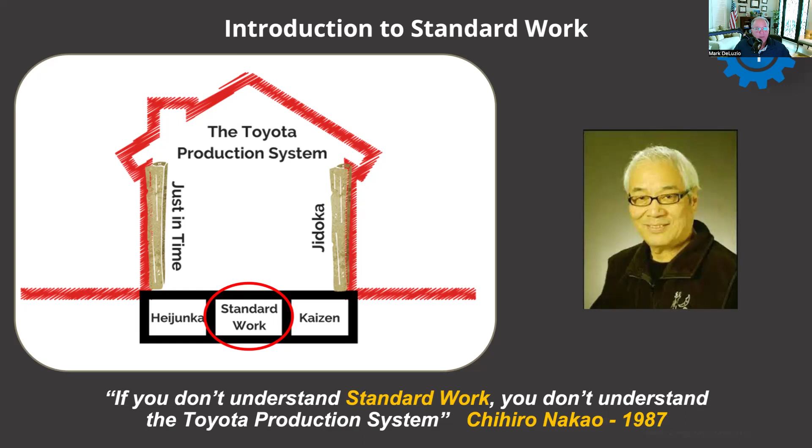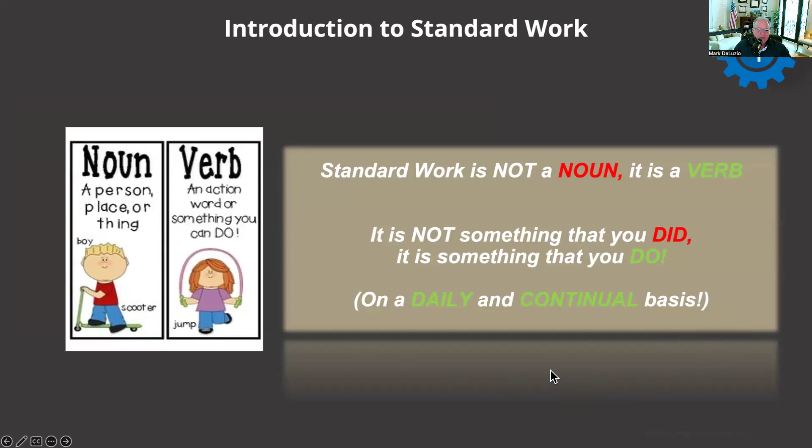Okay. I want you to think about this. Standard work is not a noun, it's a verb. It's not something that you did, it's something that you do. You work to standard work, you work to this. It's an ongoing, continual endeavor. Standard work is not a project that gets completed and checked off. It's how we run our operations.

And I'd like to give you an example of what I mean, and I like to use outside analogies. If you're setting up a manufacturing cell, or let's say a flow in an office, and again, one of the requirements for standard work is it needs to be a repetitive process. You look at people and process layout, instructions, and what I call rhythm. I'll get to that in a minute. People: in manufacturing, of course, your production workers, your operators. In the office, you have your office staff. And in an orchestra, you have your musicians.

Now, what about the process layout? We have a cell design for manufacturing. We have an office flow in terms of how we're going to flow work. And in an orchestra, you have all the instruments laid out in their appropriate sections, right? Percussion and woodwind and all that. Okay. Now, let me stick with the orchestra for a minute. If I said to you, hey, we got this orchestra all laid out exactly the way we want it, but we're not going to give them any sheet music, how do you think that orchestra is going to sound? Not good at all, right?

How many times have we set up ourselves, whether it be in the office or in manufacturing, and we didn't provide the sheet music, which is the documentation of standard work? And I'll go into that documentation a little bit later. We do it all the time. And then we say, well, geez, I don't understand how come that cell can't get their product out? And we have all kinds of takt time violations and everything else, which I will talk about.

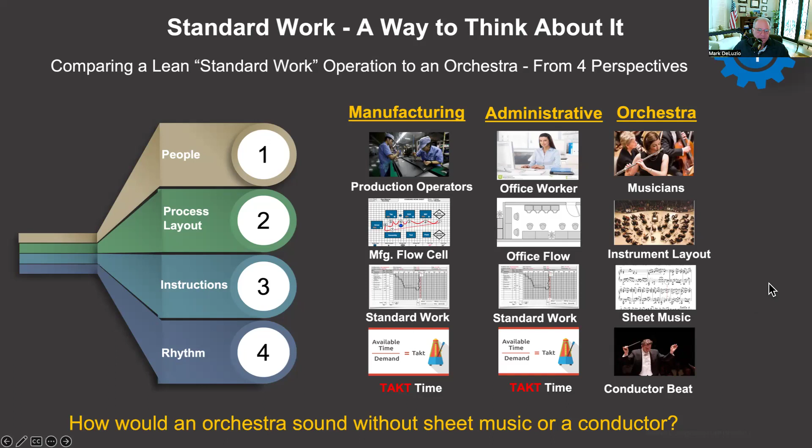Okay. What are the three elements of standard work? Well, takt time I already mentioned. Takt time is the beat, it's the rhythm of how often we have to manufacture a part or deliver a service or a document, whatever it might be. The work sequence happens to be those steps that an operator is going to take that have to be within takt time. So maybe it's assembling a part, loading and unloading, gauging, or whatever it may be, right? And standard work in process is the amount of inventory needed to keep your operators flowing.

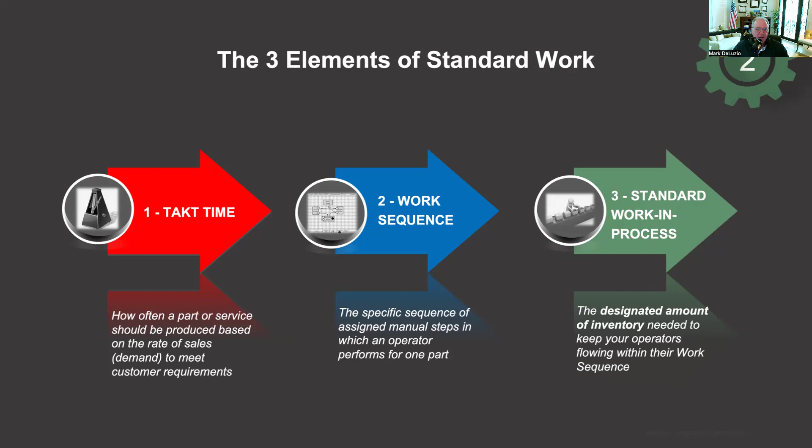So in other words, if I have a machine that has a piece of work in process in it and it allows me to walk away to the next process, that piece is called standard work in process. I'll get into that a little bit more. These are the three elements of standard work. Now, when people say, oh, yeah, we got standard work, they refer to anything and everything that's written and documented as standard work. Well, that is not in context of what we believe standard work is.

So, takt time. Okay. Right out of Toyota, takt time is the pace of sales in the marketplace. Takt time is based on customer demand. I'll show you the calculation in a minute. And don't confuse takt time with any other form of cycle time or lead time. Takt time is written in red on purpose. I'll explain that in a minute. But how often should a part or service be produced based on the rate of demand to meet your customer requirements?

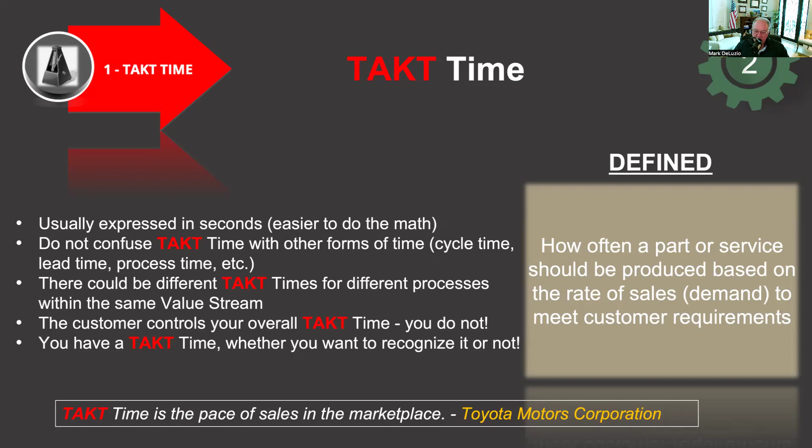Now, the history is it's a German word. The German aircraft firms moved fuselages ahead to workstation at intervals determined by what they called takt time. And Mitsubishi, who made the Junker aircraft in World War II for Germany, coined this, and Toyota incorporated it into the Toyota production system after the war.

Takt time was written in red because Taiichi Ohno was sick and tired of people confusing takt time with cycle time. So to honor Ohno and Nakao and Iwata, I always write takt time in red. Whether I draw the line, if I'm on a whiteboard, I'll look for a red marker. It's out of respect, but it's also the discipline that's instilled in us in terms of how to think about takt time so that nobody gets confused.

Now look at the metronome on the left. That's kind of like keeping the beat of an orchestra, right? That's what takt time is. What's that takt image in your company? When you walk in, can you feel a takt image, a beat, a rhythm? Can you kind of feel it? Can you hear it? Can you smell it? Can you see it? That's what we're looking for in terms of takt time.

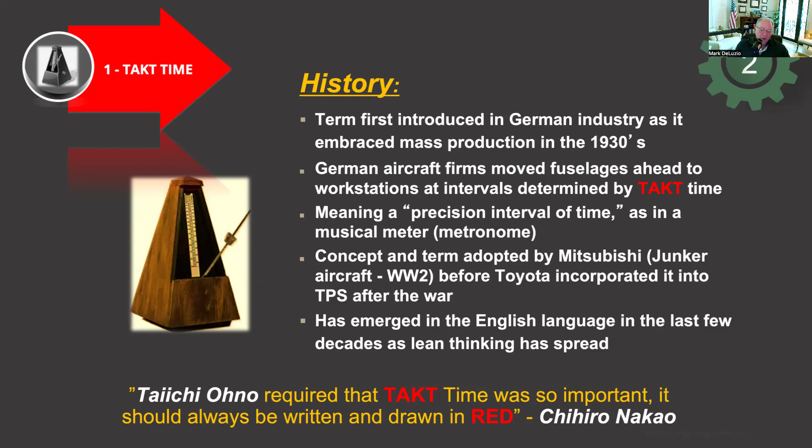How do we calculate it? Pretty simple. You take your available working time divided by your demand for that area. So this could be for a cell, for a work line, for a department. It's got to be relative to the area itself. So if I have 27,000 seconds available, and I take out breaks because that's not productive time, or cleanup time or whatever, and divide by 350 units, my takt time is 77 seconds. So that's how we calculate. It's a pretty simple calculation, right?

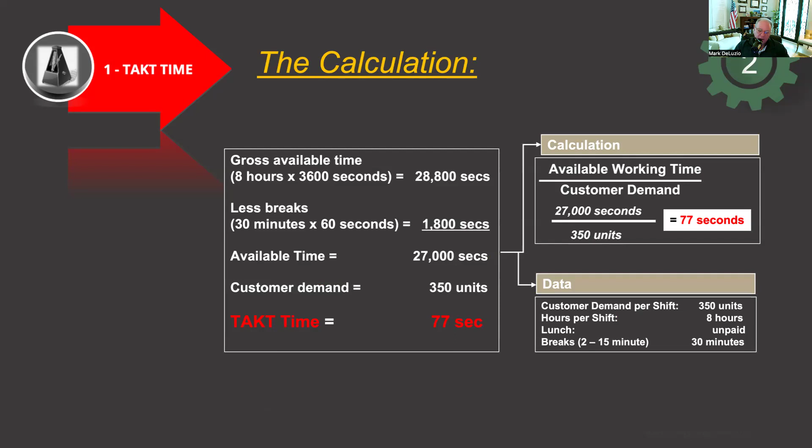Now, what do we use this for? I could use it for operators required. I take my cycle time divided by the takt time. The cycle time is all of the seconds it takes to make one product. So let's just say my takt time happens to be 100 seconds, and I have 900 seconds worth of cycle time. When I divide those out, it means I need 9 operators.

Now, no one of those 9 operators can have work more than 100 seconds. If I have one at 110 and everybody else below takt time, guess what? My drop off rate in that cell is 110 seconds. So I'm going to miss my deliveries because I am not producing in accordance to takt time, in this case, 100 seconds.

My standard work in process. Well, if I have, let's say, a curing oven or an outside process that goes to, let's say, heat treat, I take the lead time divided by takt time. That's how much inventory I need to have in the cell for me to continue to work in a one piece flow environment.

And my processing capacity is my machine time and my load unload time. That has to be lower than takt time. Otherwise, I'm going to have a bottleneck with that piece of equipment. Again, if my takt time's 100 seconds and my machine cycle time plus the load unload time happens to be 120, I'm going to miss by 20 seconds every time I have a part pass through that machine. And that adds up at the end of the day. So not only do our operators have to be in concert with takt time, so does our equipment. And all this gets documented on a standard work combination sheet, which we'll show you in a bit.

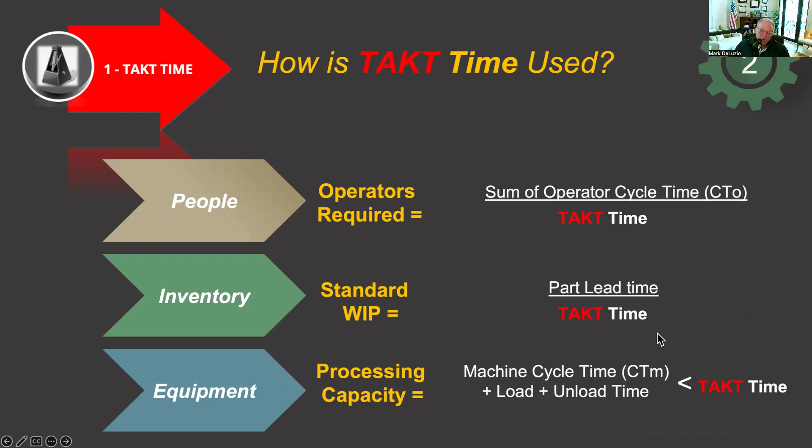Okay. Work sequence. This represents the steps required for an operator to complete one cycle of work for one part. Remember, the work sequence must be equal to or less than takt time. If it's greater, you got yourself a bottleneck. So let's just take the three people in this cell. They're probably doing unload, load, assembly, gauging, whatever it is, right?

That sequence, the amount of time it takes that operator to do that, including walking time, which we want to reduce as much as possible, is in fact the total cycle time for that operator. And it's got to be under takt time. Same with the other operators as well.

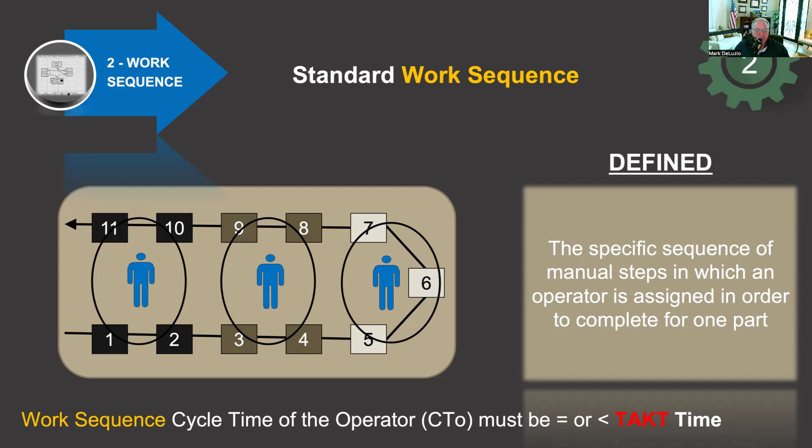So again, I want to make sure that my operators are within the context of takt time. That's my work sequence. Now here's a way to think about it. One of the things Nakao told me was, DeLuzio-san, how can you hit takt time when you have your operators doing all these other jobs that aren't spelled out in their work sequence in the context of standard work? You've got your operator leaving the cell to go get tooling and go get materials and deliver parts to finished goods. Well, that's not part of their standard work.

He said, DeLuzio-san, operators should operate. That's all they should do. Now, the analogy I like to make is race car driving. The driver is the operator, the track is the work sequence. Our job is to keep that driver on the track as long as possible until they win the race, right? Well, maybe we want to save on productivity and get rid of some pit crew people, and we'll have the driver change his own tires. Well, that's not going to work, right?

In the old traditional cost accounting, I was taught that indirect operators are waste and direct operators are not waste. Well, guess what? How would you like to get rid of your pit crew just in the context of saving on cost? If you're a race car driver, guess what? You're going to lose the race. Now, both of those indirect and direct operators have waste within their cycles. Just because the operator is putting a product together doesn't mean that that direct operator doesn't have waste. And same goes for the indirect operator.

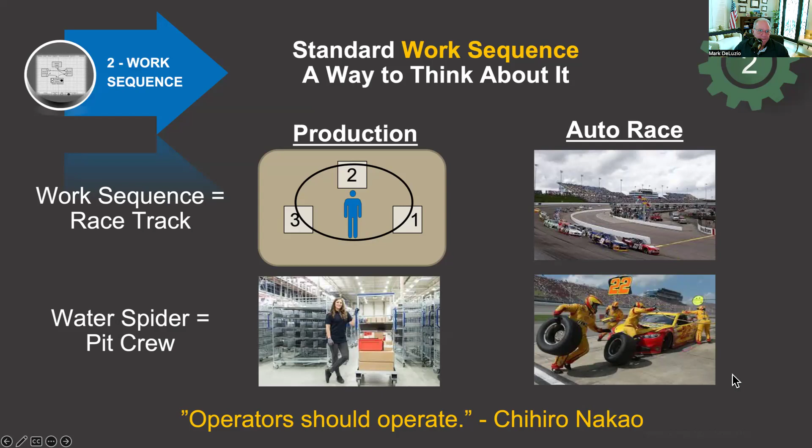Okay. Standard work-in-process. It's the amount of inventory needed to keep the operator flowing. So what I don't want to do is have the operator load a part into a machine, hit the green button, and stand there and watch it. What they should do is unload the part that's been there already, load the other part, hit the green button, and move on to the next operation with that part. You're not going to stand there and watch your clothes dryer dry clothes. You're going to walk away from that and go do something else, right? So we want to think about where the opportunities are.

Now, a lot of businesses have curing ovens, they have burn-in times, and all that. By the way, I would challenge these burn-in times really big time. So many times they're divisible by 8 hours. It doesn't sound like an engineered standard to me. I once challenged a 48-hour cure time, and when the engineers got done, it turned out to be 20 minutes. Think about that. So challenge everything and don't accept these times as being gospel, especially when they're divisible by 4 or 8 hours.

So you're going to see that. Oh yeah, we have to burn that in for 8 hours. Geez, that's what your shift is. How come? Oh, the engineering standard turned out to be exactly 8 hours. That's amazing. On this 48-hour one, I just challenged them and said, "Can we do it in 47?" They said, "Yeah." How about 46 hours? Yeah, it should be okay. I'm going to keep going until you tell me to stop, guys. Well, they didn't know. And when they went and did the study, they found out that it only needed to be 20 minutes of curing time. So challenge everything.

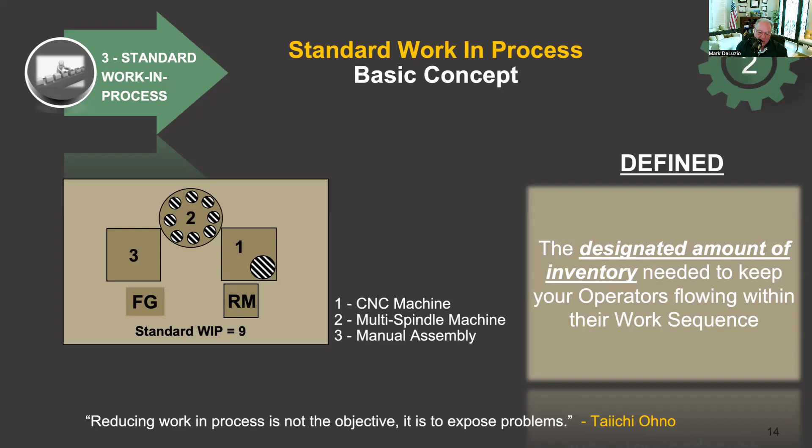This is right from Toyota, right off their website. A standard in-process, work-in-process stock is the amount of material that is flowing through a process when work is proceeding smoothly. It is the minimum amount of material needed to maintain a smooth flow of production without accumulating inventories.

Got that? That's right out of the mouth of babe, if you will. Okay? Right out of the mouth of babe.

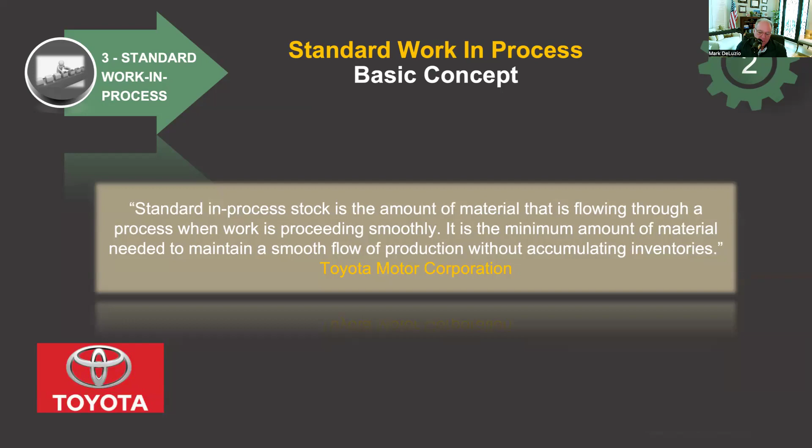I'll let you read about pitch, I'm not going to get into that too deeply right now. But pitch is the amount of time the water spider has to come back to replenish the inventory, and that's based on takt time.

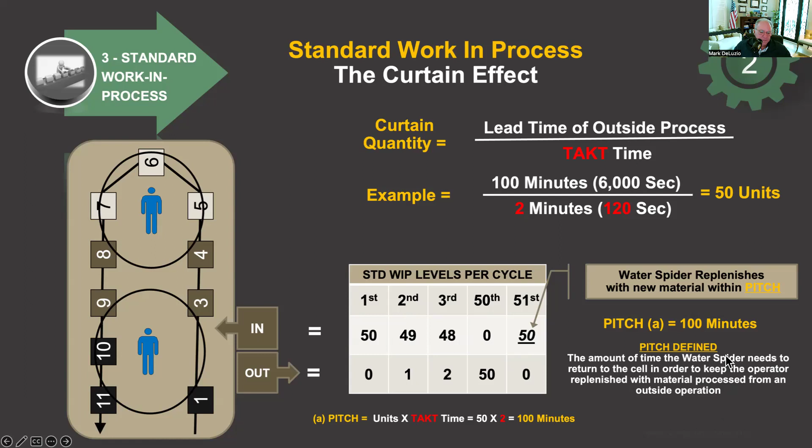There's 3 types of cycle time. The operator cycle time is the amount of time the operator takes to complete one work sequence. There's a machine cycle time, the amount of time it takes for the machine to cycle for one unit. And there is the processing cycle time, which means your machine cycle time plus your load and unload of that equipment. All right, so that's the three.

Now everybody seems to confuse this with takt time, and it's not. It is not takt time, it is cycle time. And all these cycle times have to be in context, within the context of the takt time.

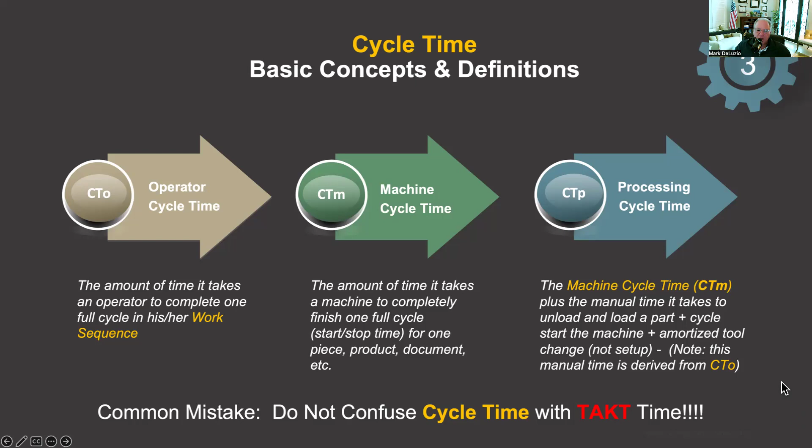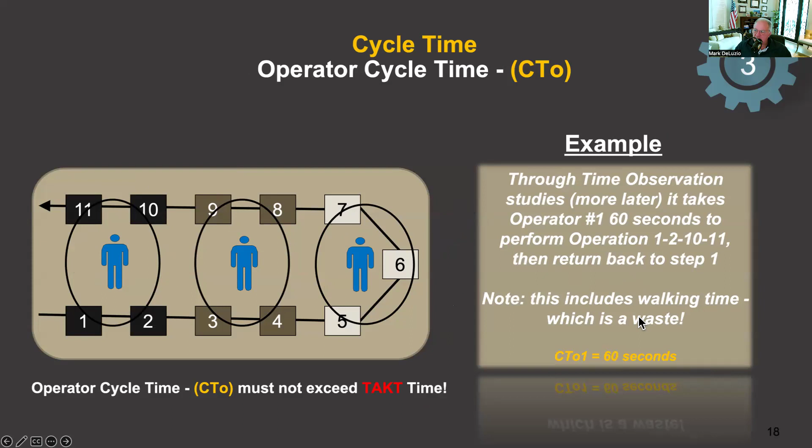A way to look at it: if the operator takes 60 seconds, operator one takes 60 seconds, the cycle time of the first operator is 60 seconds. That has to be under takt time, and you want to bring it as close to takt time as possible.

The cycle time of the machine would basically be when the operator starts the machine, the time the machine takes to cycle, and when it comes to a stop. That's the cycle time of the machine.

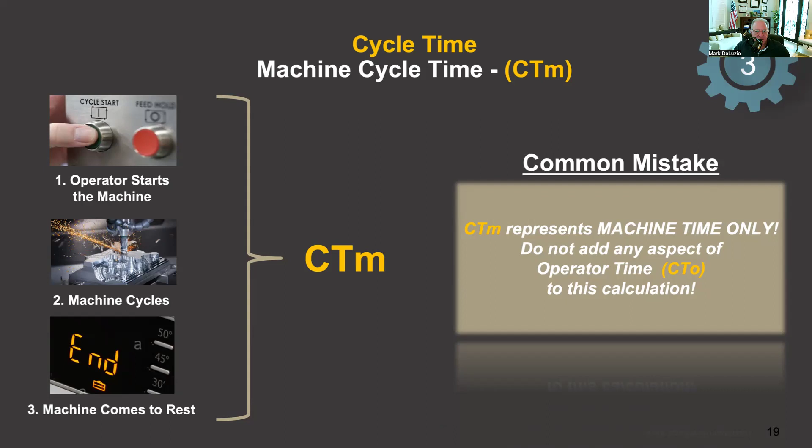The cycle time of the process is that machine cycle time I just talked about, plus the operator unload and load time. That's key - load and unload - because when I'm unloading a machine and when I'm loading a machine, it's not running. So I have to account for that time as it relates to its overall processing time. And then I compare that to takt time. So anyway, that's what we're talking about here.

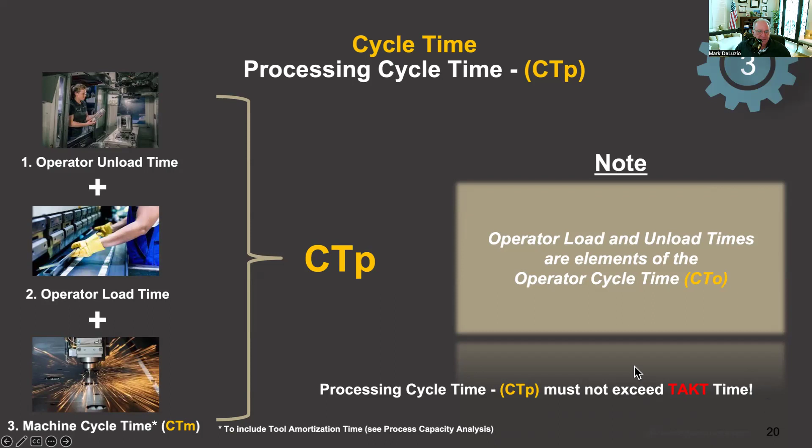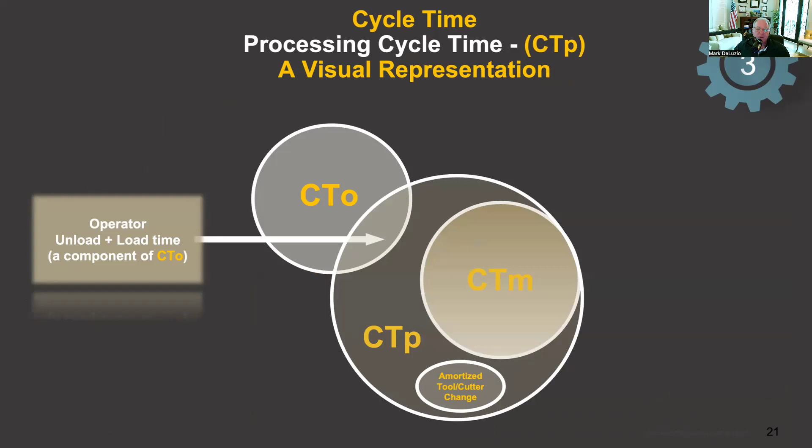Maybe a different way to look at it: you've got the cycle time of the operator - not all of it, just the load/unload in this case, in my example - is going to be part of the cycle time of the process combined with the cycle time of the machine. So that is what we're talking about when we talk about cycle time of the process.

These happen to be the documentation that we use, 5 forms. Let's start with the one on the left. You've got your time observation sheet where you're actually observing an actual operator for a particular work sequence, and you come up with the time for that operator. The processing capacity form down here is measuring your equipment and your machines. This form in the middle is a combination sheet where we combine both the operator and the machine processing time to figure out whether or not we have an issue relative to takt time.

You can see I have takt time here written in red, and all the relative times for the machine, which is the dashed line, and the dark line, which is a manual cycle time, and that squiggly line, which is the walk time.

This standard worksheet is a visual picture of what the work sequence looks like. Now look at this one. There's an awful lot of walk time for this operator. Let's go from 7 all the way back to 1. Remember last time I showed you the operators going side by side? Not in this case. And that's very inefficient. That's what these things do. They point out all the inefficiencies. But remember, we hold the standard based on what we observe. We don't just make this stuff up out of some book.

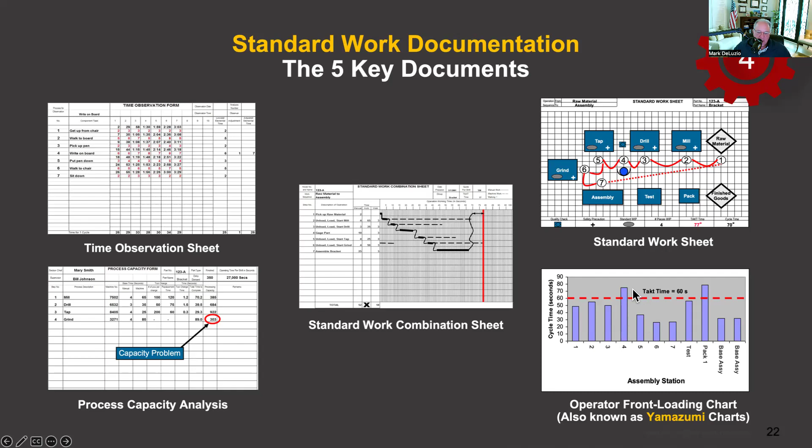Look at operator 5. Operator 4 takes close to 80 seconds. This operator number 5 only takes 40. Guess what? He's going to be waiting that difference for the part to come back to them.

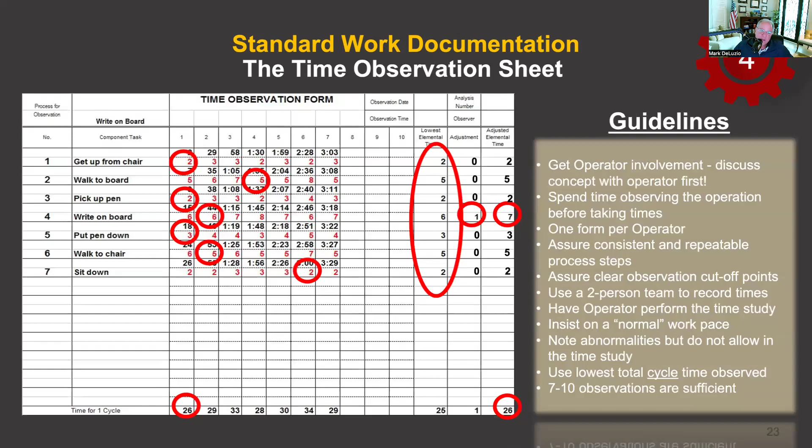I won't get into a lot of gory detail here as to how to look at this. Suffice it to say, though, we want the operators to be involved in this and let them lay out the work sequences, and let them take their own times. So this is a time observation form where we actually calculate the actual operator cycle time.

And again, right out of the horse's mouth here, Taiichi Ohno says standards should not be forced down from above, but rather set by the production workers themselves. How many people do that? How many people actually have their own production workers set the standards?

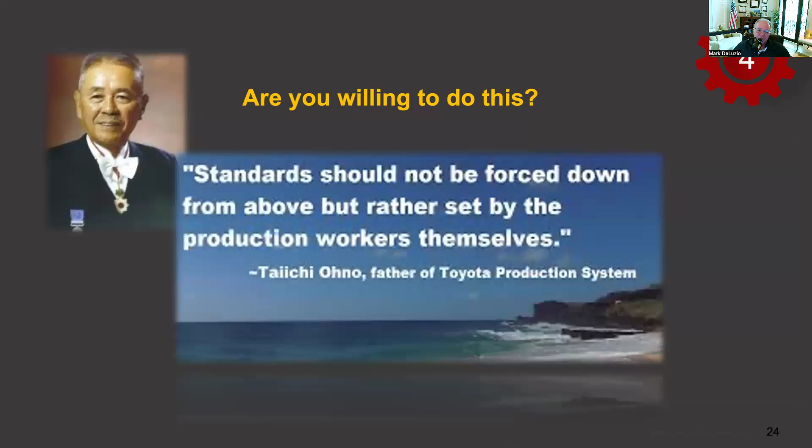What we're talking about here is we do not want continual Kaizen. We have to stabilize through standardization and see our deltas to that standard, then prioritize those issues, whether it's machine downtime, supplier availability, quality issues, whatever. Why are we missing our standard? That is the essence of standard work. It's a tool for continuous improvement. It is not a tool to try to emulate all your waste.

A lot of people want to put waste in. Hey, by the way, the machine shuts down every 10 parts. So for every 10 parts, it shuts down for 20 minutes. We should build in 2 minutes of cycle time into our standard work. No, I don't want to hide that. I want to have it come out as a delta, as a deviation, so we can prioritize improvements.

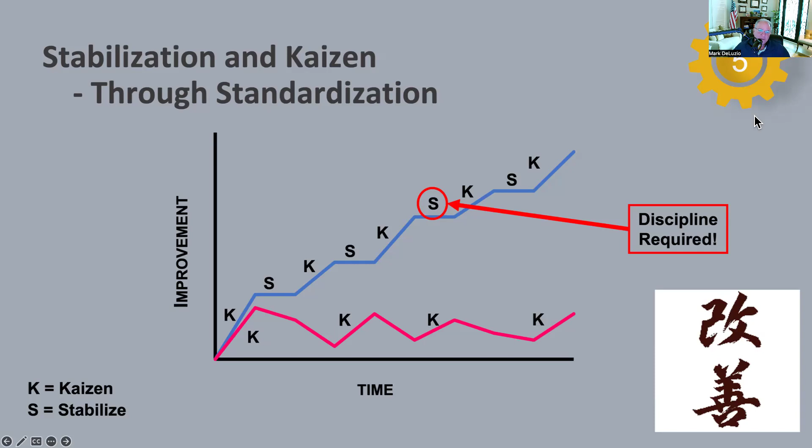I showed this slide, I think, in one of my other presentations, but many good companies, Fujio Cho, ex-chairman of Toyota, tried to practice Kaizen and use the various tools. They have to have all the elements work together in a system. You can't cherry pick tools and just put in the things that you want to put in.

You can practice every day. Remember, I told you that standard work is not a noun, it's a verb. Well, here you go. Know normal from abnormal and know it right now. That's where your visual management comes in.

And this is the cycle of improvement. Think about it: you have your standard up on top, you detect abnormalities, you go to root cause analysis and Kaizen, and change the standard to get you back to where you need to be.

Now, I like to look at daily management on the hard side and the soft side. A lot of times we collect all the data, we put up all these Gemba boards, but nothing's really going on relative to responsibilities in terms of our value stream manager, our operators, our team leaders, supervisors, whoever. We have to have those meld together in concert, they have to be integrated. Otherwise, all you're doing is a bunch of work and you'll be fighting the same demons time and time again as you move forward.

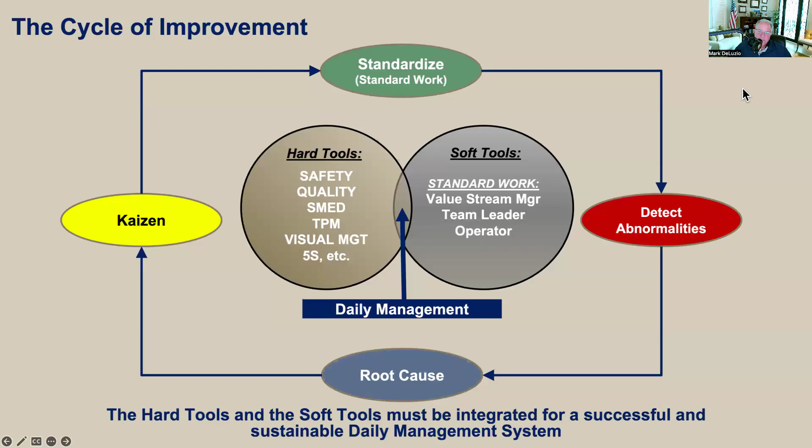Do I do machine Kaizen, or do I just get out my checkbook and say, hey, I'm going to buy a new machine? A lot of companies do that. That's not what we want to do here.

I rewrote the capital appropriations request, and I talk about this in lean accounting, where you have to first tell me why you need a machine, what Kaizen you did on the old equipment, and a bunch of other questions like what's the takt time? Is this a battleship or a PT boat? I don't want to buy a big machine that does 50 different operations at once. I'll just create a takt time problem.

This actually happened to me. We had a client who had a cell. I'm going to make up the numbers because I don't remember exactly, but you'll get the idea—it's very representative. Five machines, takt time was 2 minutes, 5 machines, all of them met takt time. Let's argue every machine had a 2 minute cycle processing capacity. So everybody met takt time, no problem. Total processing capacity was 2 times 5, 10 minutes.

Now they went and bought this big behemoth machine where they combined all these operations into one machine, and the total processing time was 7 minutes. So I got there, saw this thing, and said, 'Oh my God!' They bought a battleship, and the client said, 'Hey Mark, we saved 3 minutes of processing time on this machine.'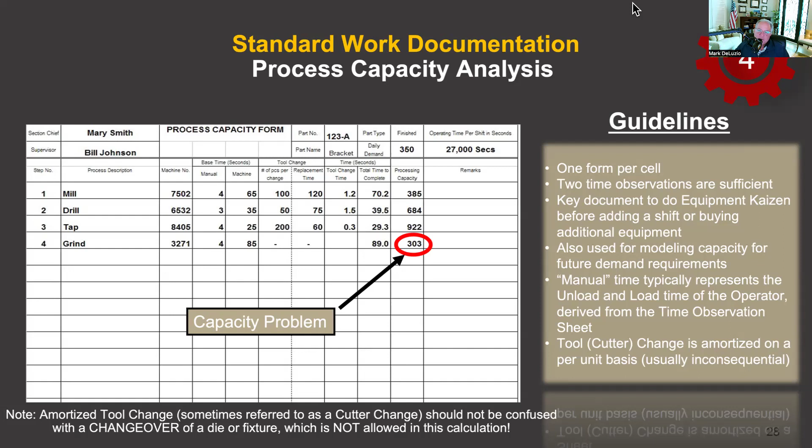This is where we bring in the combination sheets, where we actually bring in the operator and the machinery into one form, and we look at it together. In this case, my total cycle time, including for the operator, is 70 seconds, it looks like. And my takt time is 77.

Well, I'm within the context of takt time, aren't I? But let's say I have a problem on one of these—let's say a load/unload gets stuck or something. How do I account for that? That might put me over takt time.

If I start looking at all these problems and I can't hold to this standard, I prioritize those into Kaizen events. That's what standard work is used for. Again, it's not to document every little thing you do. Standard work is used for continuous improvement.

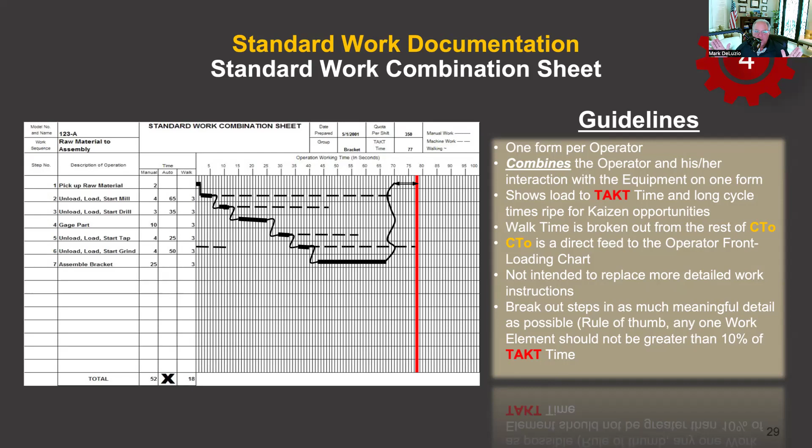Standard worksheet, again, you probably saw that earlier, where you're showing the flow of the operator.

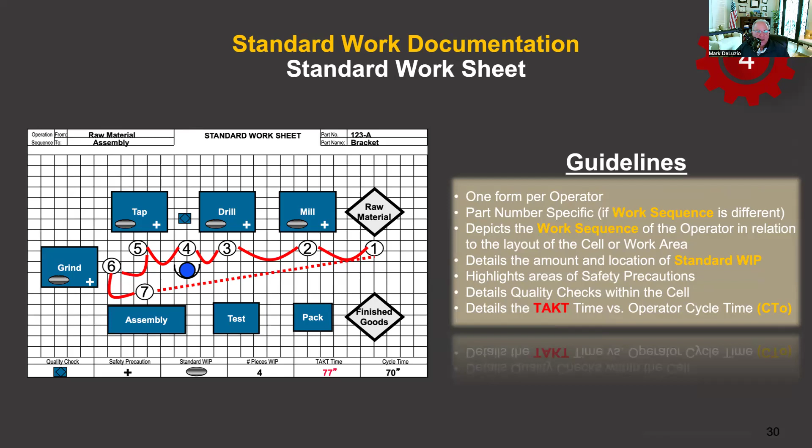A question you might ask on this one is, why do we have this operator going all the way back to one from the back of the cell? Once the operator gets done with number 7, he has to go all the way back to the beginning of the cell. That's all waste. And these tools are designed to help you see that.

I told this story already earlier about the guy saying, 'DeLuzio-San, you don't know standard work.' Again, lesson learned—remember that story as you go through, and catch yourself. If you're not doing it but you say you know it, you might want to catch yourself and check yourself at the door.

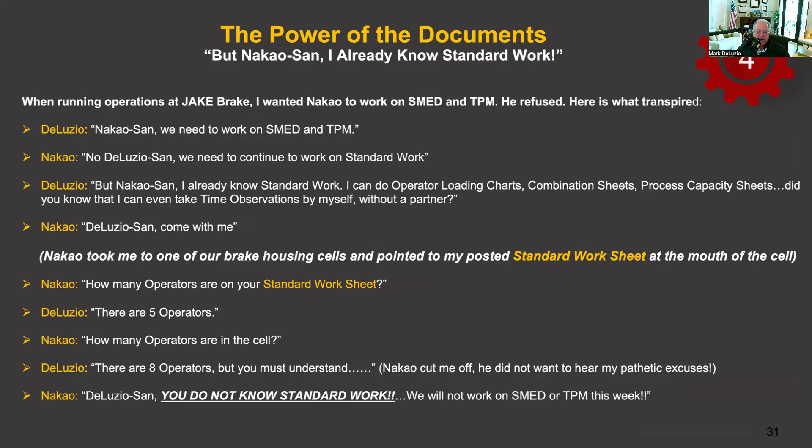Last chart is what we call a Yamazumi chart or front loading chart, where we initially lay out all of our operators. So you can see on the top here, we have 2 operators over takt time and everybody else seems to be under. Well, I want to redistribute all this labor back, what I call front loading, and move everybody up as close to takt time as possible, and the least operator being the last one on the end. And as I make improvements, I'm constantly shifting my labor.

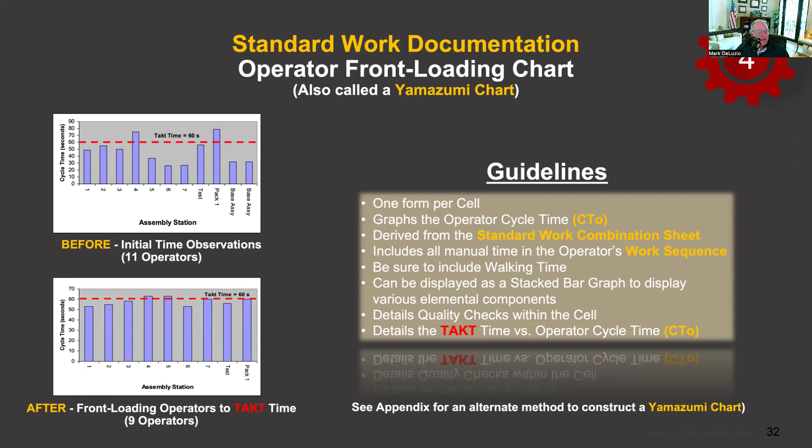We don't want to balance. So many times I hear people, we have to balance the takt time. No, because as you see in that middle chart, we will overproduce. We will produce too fast in a one piece flow environment. We're going to produce too fast. We want to bring people as close to takt time as possible and have what we call a least operator.

All that waiting time you see on every one of those 5 operators, A through E in the middle, we put into the least operator at the end. We want to see that visible, right? And as I take more time out through Kaizen, I will continue to redistribute and front load my cell where eventually operator E goes away and we redeploy the operator somewhere else in the factory. Okay. So that's how we make improvement here.

Otherwise, if I made a bunch of improvements on A, B, C, D, and E and just brought everybody in the middle down a little bit more, I haven't done anything with my labor in terms of headcount. And I might have to hire somebody else in another part of the plant because I didn't free up operator E. Okay. So something to think about as you go with this.

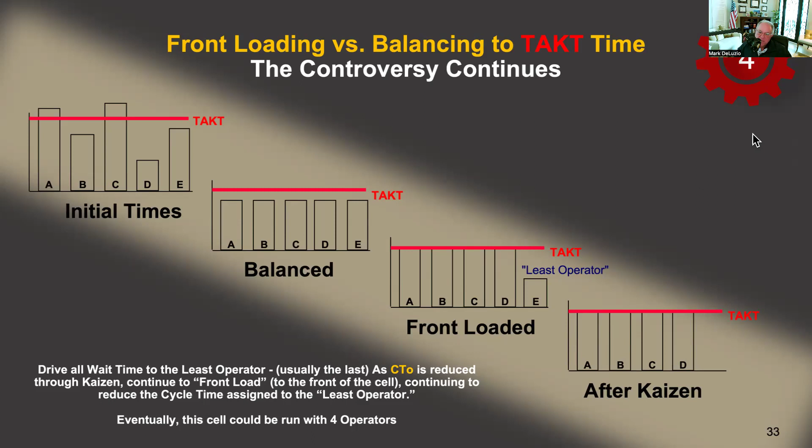And then after Kaizen, when we do enough Kaizen where all the cycle time goes away, either in A, B, C, D, or E, we redistribute. We come back and we got 4 operators loaded to takt time. Okay. And the process will continue where D becomes the least operator as we go through.

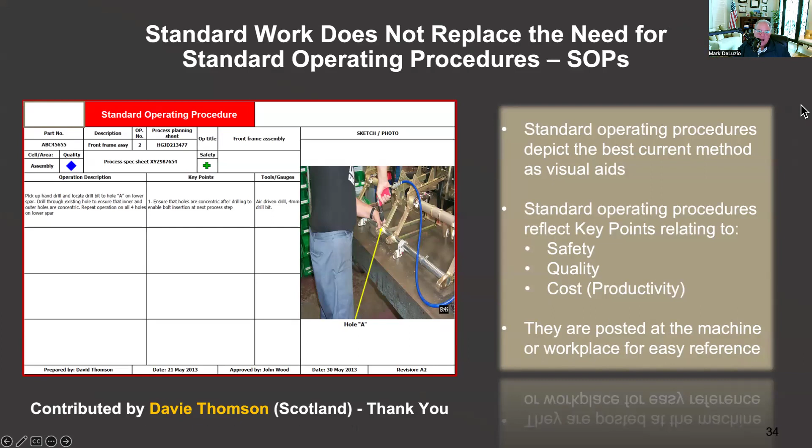Okay. Keep in mind that standard work does not replace standard operating procedures or work instructions. Please do not think that's all you need. They're not detailed enough to do what this chart is doing. So we still need these kind of tools to back up the specifics of what operator is doing. Okay.

And lean does not mean less employees are needed. I can tell you right now, if your company is not guaranteeing no layoffs because of lean improvements, you got a train wreck on your hands because nobody's going to sign up to make improvements if they know they're going to Kaizen themselves out of a job. It's simple math, and I can't believe how many companies have not done that.

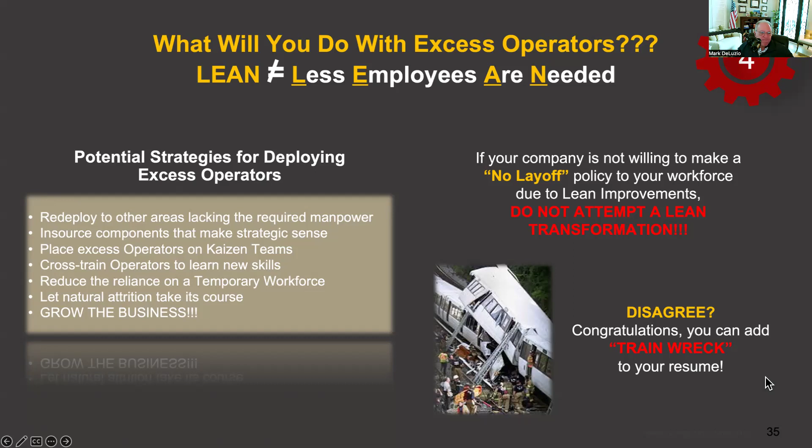And worse yet, when there is excess, they march them out the door. Then they come to the other employees and say, "Hey guys, you want to get involved in the Kaizen team? We'd love to get your ideas." Yeah, I bet you would, right? Those operators will work against you and they'll find ways to maintain their employment and you won't even know what hit you. Okay.